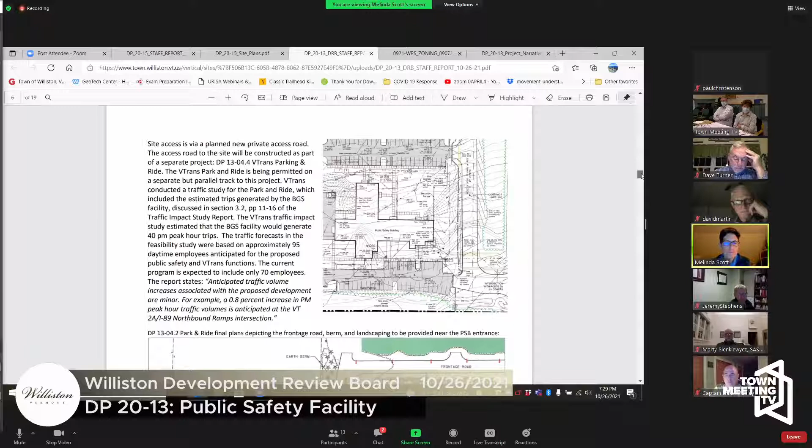The traffic impact study estimated that the BGS facility would generate 40 p.m. peak hour trips. The traffic forecasts in the feasibility study were based on 95 daytime employees anticipated for the proposed public safety and V-Trans facilities, and the current estimates are 70 employees. So the report concludes that the anticipated traffic volume increases associated with the proposed development are minor.

For off-street parking and loading, the vehicular parking proposed complies as proposed. The proposed use is rather unique, and the state is partially exempt from zoning, so staff does recommend approving the 86 parking spaces.

There is not, when usually we have a parking analysis with the use indicated, based on Table 14A of the bylaw, which specifies required parking based on different uses—but this use is actually not included in that table in Chapter 14. So it's kind of at the discretion of the DRB to determine the allowed parking.

Staff does think that the amount of parking is pretty reasonable given the use. The applicant is proposing 86 parking spaces: 36 public parking spaces, including 3 ADA spaces, and 50 employee parking spaces and 1 additional ADA space. The parking lot design, landscaping dimensions, ADA, and bicycle parking all comply with the standards of WDB 14. It's only the number of vehicular spaces that would need an exemption from WDB 14A.

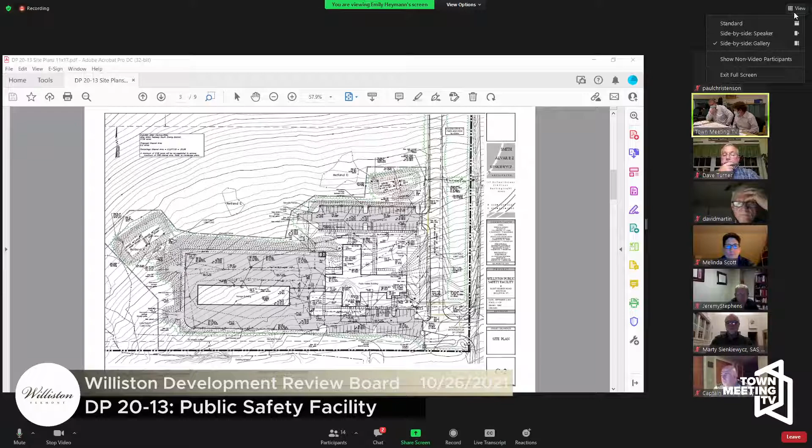So I'll do my best to describe it. Essentially, as Melinda discussed, the project will share access with the V-Trans Park and Ride on the south end of the site. Vehicles will come in and turn right to go to the park and ride and to our lower parking lot, the employee parking lot. Public users will go in straight from Route 2A into the site where the public parking is, then through a gated access to get to the storage building and those facilities. The public safety building is directly north of the public parking. We're taking advantage of the hillside to have essentially a walkout building, where one level is on the public parking and you'd be down a full story on the north side facing the employee parking.

The monopole we're talking about is, I would describe it as just off the northwest corner of the closest wing of the building towards the lower parking lot. It does say new antenna there on the plan. I want to make sure everybody watching is aware of what we're looking at, so there's a label there that says new antenna, and I know that's a concern.

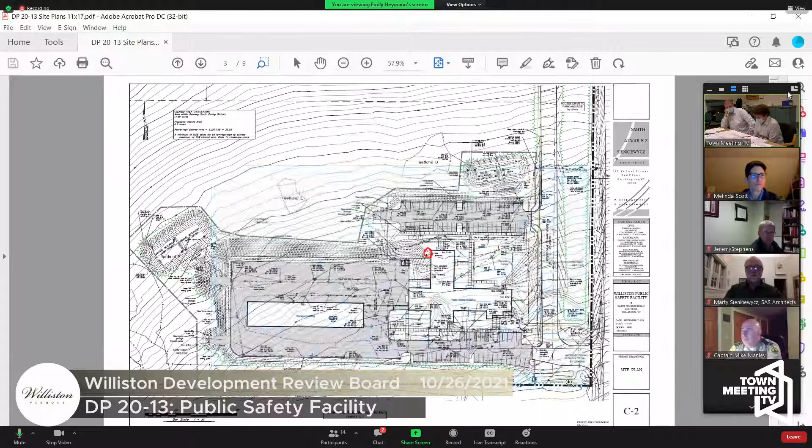There are other particular site features people might be wondering about: the two stormwater treatment practices, our gravel wetlands. One is off to the northwest corner past the storage building and that parking, and one is directly north of what we're calling the lower parking lot, the employee parking lot, back towards where the park and ride is going to be. So those are the things that came up during discussion. Was there anything else people wanted to know the location of?

Public access is on the south side of the building, right across from the public parking. The Sally Port is off to the west side, basically facing the storage building. So you go through the gate, keep bearing to the right, and come around to the west side of the building in the back. The lower parking lot is basically for the 911 call center and employee parking, and that'll be gated access as well.

It might be useful, and I realize you're working in tandem with, I'm not sure who, is that you Simon drawing on here? Nicely done, I think he's got it. Maybe just outline where the fence is and where the gates are, since we've been talking about fencing here and screening and whatnot.

So the first gate, if you look at the public parking area on the south side, you see where it says new concrete curb in the middle of the parking lot—it's just to the left of that. You can see where the fence comes along the south side of the property in front of, behind the storage building parking, then turns north and goes across, then comes along in the general area where that Sally Port is. Simon's just outlined the gates in green, that's accurate. The other gated access is to that lower parking lot, the second access off from the V-Trans Park and Ride Loop Road.

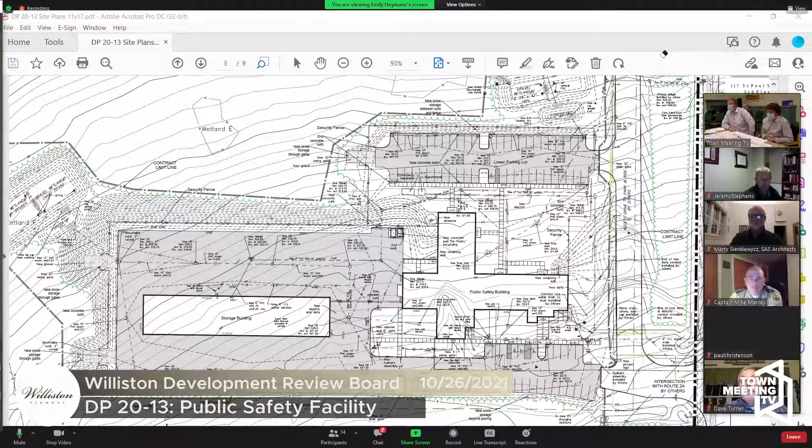For the park and ride? So we'll be seeing that application soon. You've already seen it, already permitted, right? You've seen the discretionary permit and amendment on the park and ride. They've filed final plans and are in process with the administrative permit. So you won't see it, but you have.

We have seen it, yeah. They're slightly ahead of us. Yeah, they're about one step. Not for long. Yes, which

Facility is scheduled to be completed first, the park and ride? It's definitely sort of a parallel path. I think there's a very good chance the construction will be occurring on both at the same time.

So is the access road going to be built in its entirety, top and bottom, at once? We haven't really compared their schedules. Our hopes are that they get this curb cut in for us, and if they don't have it built, we'll have to work with them on getting our construction vehicles in while they finish their road. I assume your plan, if they don't have it built, is you're gonna be bringing it in on the south entrance.

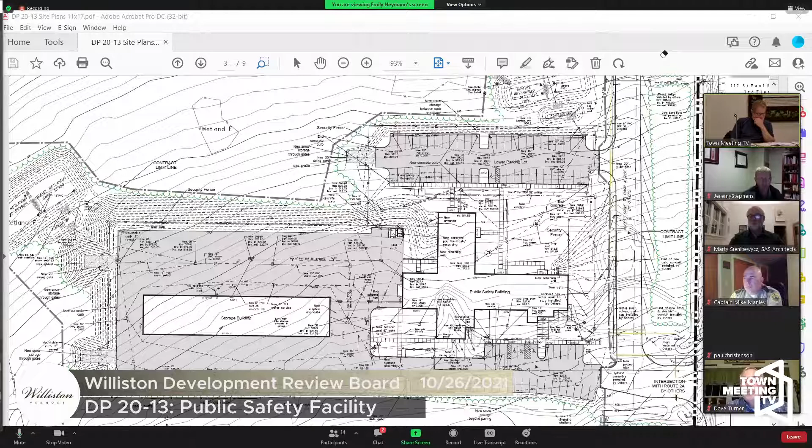We're gonna have to build an access road through their curb cut area to get into the building. But we've been in communication with them, and our hopes are that they get this built for us, or roughed in, so we can use it for construction vehicles. Okay, yeah, it's interesting, I'm looking at the plan here, at the south entrance to the parking lot.

It doesn't look like the driveways line up right there on this plan that I have. It's a bit of an offset entry, and that was to stay away from a stream buffer. There's a small stream just off the property to the south, and so we had to tweak our entry over

to address that. So which of these is accurate? It's accurate, but it's just, it doesn't look like a perpendicular T. Okay, so the south side comes in at an angle? Correct, yeah, so the curve on the access road is gonna kind of come around and meet up with the,

yeah, I'm not sure how that's actually working, to be honest with you. The plan I'm looking at, they're offset by probably 10 or 12 feet. I'm not sure where you're talking, John. I'm looking at this, actually, it's the north, I guess it's the north access point, not the south, I'm sorry.

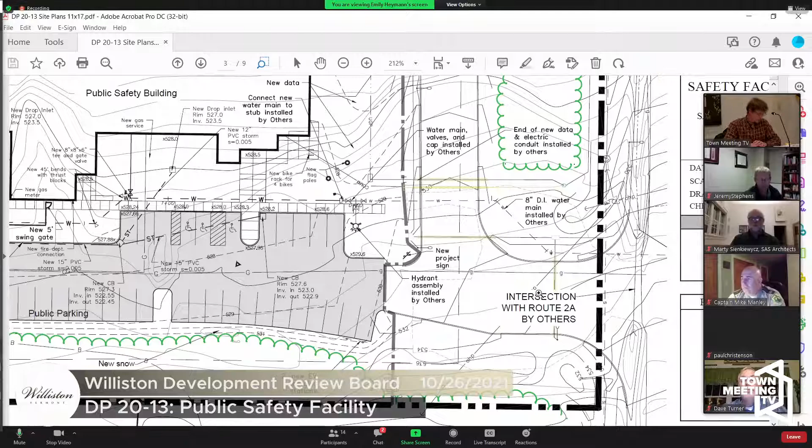Well, this is south, isn't it? The south at the bottom, so I'm looking at the one in the north, the lower lot entrance, the employee parking lot. I see perhaps a very small offset, which we'll fix. Okay, I'm looking at sheet L1, maybe that's an older version. Oh, that could be. Yep, that would do it.

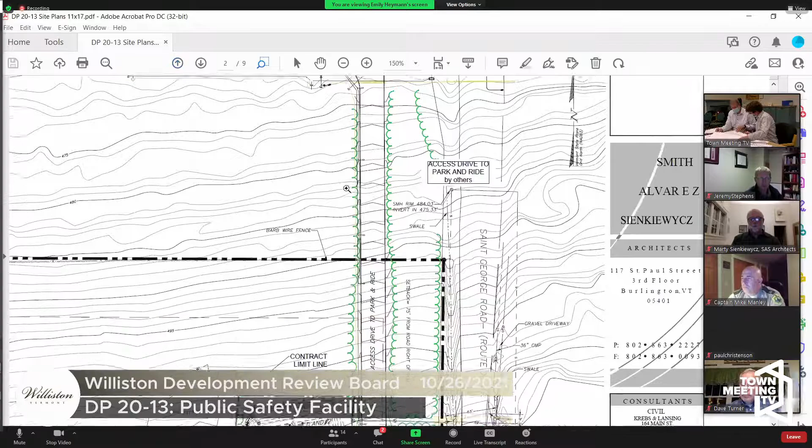Never mind, you might want to adjust the landscape plan. They're always the last to know. They are the last to know, you're absolutely right. That serves me right for looking at the landscape plan. C2 seems to line up. Yeah, so, all right, we've straightened that out, so to speak.

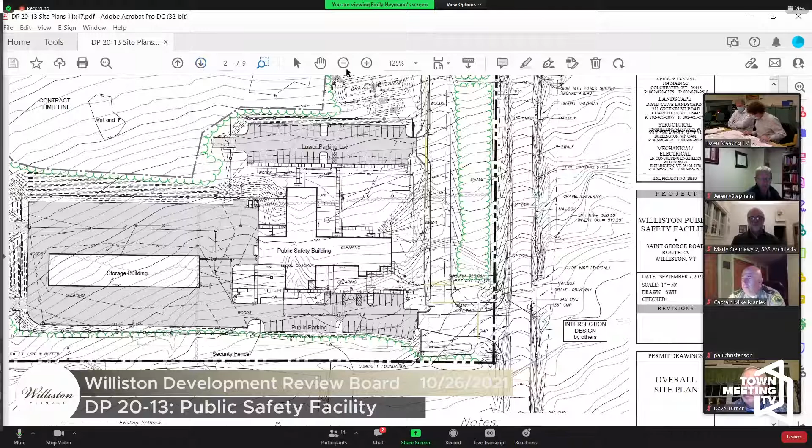So I think I'd like to hit straight on a couple of the issues that staff brought up. Let's talk about the monopole. I think it's important here that, my understanding is we're trying to establish that it's necessary for the functional intended use of the facility for us to allow this exemption. I think that's the way I read the rules here. So you've submitted a report saying that you need an 85-foot pole.

Is that right? It came from a company called Comcast. I think, yeah, ComCheck, I'm sorry, ComSearch. ComSearch it is, yep. And so they did a microwave path survey from our site to both Camp Johnson and Mount Mansfield. I see, and that's what we have to have communication to.

All right, and are there requirements of how close to this building that pole needs to be? I believe so, I believe it has to be within 15 feet is the number. Actually, it's 10. It's 10. Okay.

So how tall was the pole down at the existing facility, down at the bottom of the hill? Captain Manley, do you know the answer to that? Sorry, I don't have the exact measurement. I can get it, it's a pretty substantial tower as well. I think the information actually shows up in your report somewhere that it's close to the same size, about 85 feet.

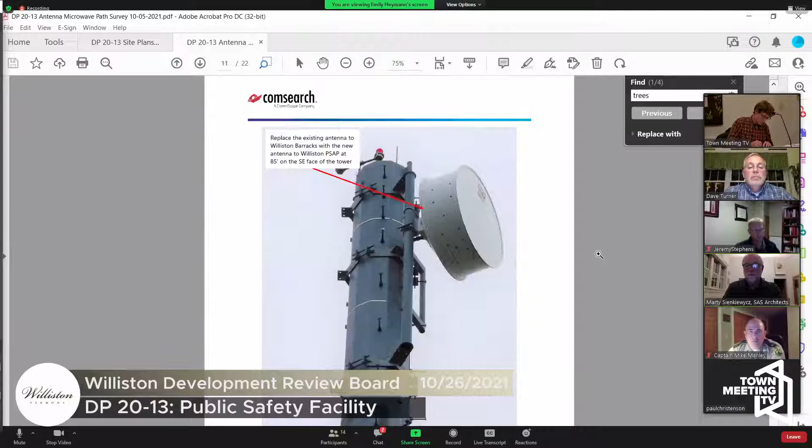So what color, what color? He said to match the sky. Match the sky, right, is it on a sunny or a cloudy day? Well, there's a lot of studies that have been done about that color, and I think that, for example, a lot of the big windmill towers that you're seeing now have studied that a lot, and their color does a good job of matching the generally overcast skies that we see here.

So I'm thinking it's that kind of light gray color. The pole will be painted. So it'll be painted, and I assume that that's a color that'll be submitted with the final application as well. Yes, we can do that.

So, Paul, did you have anything you wanted to ask about the pole? One thing I was gonna ask is, would the higher pole improve the cell service down the interstate? I would say only if there's any cell providers sharing that pole. It'll improve it at my house too, but that's not a cause of concern.

Let's talk about one of the other items that came up here, which was the lighting and the lighting control sequence. The HAC made some very specific suggestions and recommendations, and I'd like to hear how you feel about those. We actually went through it with them. This map on here between the blue, green, and red, we're okay with. The other conditions are fine, with the exception of what Melinda had mentioned about the dimming levels.

Thank you. So basically, if you get the tenants that you have on this existing antenna, the new antenna would have a similar population with cellular and other radomes on it.

I'm not sure what he said. So, like on this antenna right here, on the pole, I'm assuming your microwave dishes are the white one right behind the line and the other one headed towards the transmitter site. That would be my assumption. I'm not a radio person, but that would make sense.

And the rest of them above that are cellular? That would be my assumption as well, yep. And then we have the Jericho Fire Department on there somewhere as well. Okay, thank you. You're welcome.

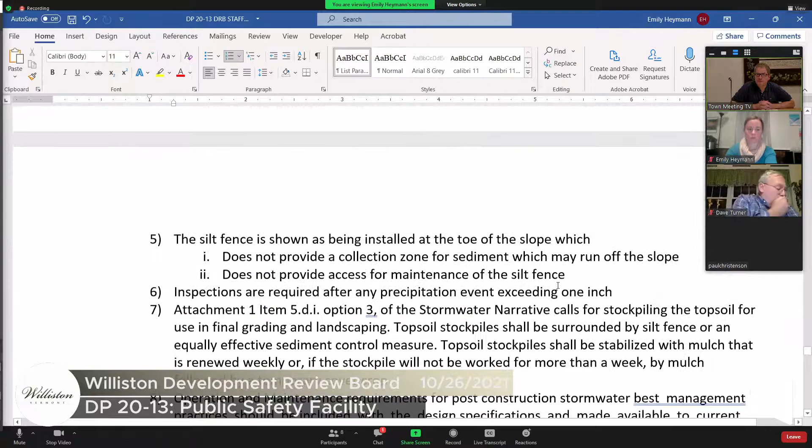Okay. This is great. What condition is that? This is 2D. Is that condition, okay, is that still condition 2? 2D4. 2B4? D. 2D4. The HAC recommends that the outdoor lighting levels be modified as follows.

Employee parking (blue): lighting shall be dimmed by, excuse me, let's try that again, lighting shall be dimmed to 75% from dusk till dawn, and then the sentence goes on from there.

Scrolling down, security lighting area (red): the storage area shall be dimmed to 75% during night hours, and the sentence goes on from there, unchanged. Next section of this condition: all pole-mounted fixtures (labeled SA) on the south side of the public parking lot and storage area. Sentence goes on from there, unchanged.

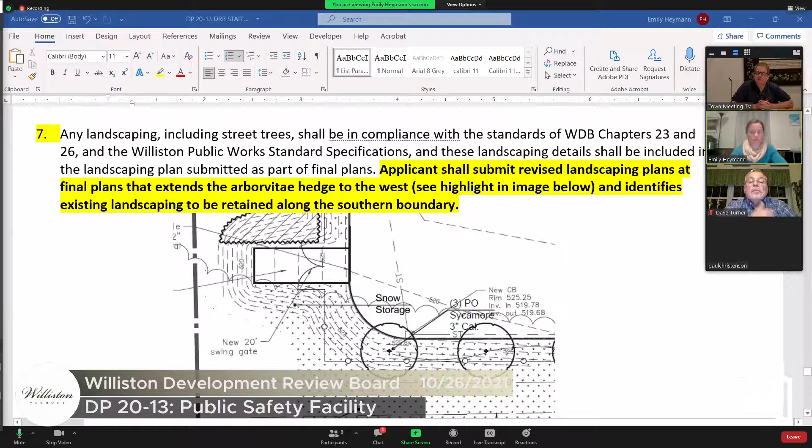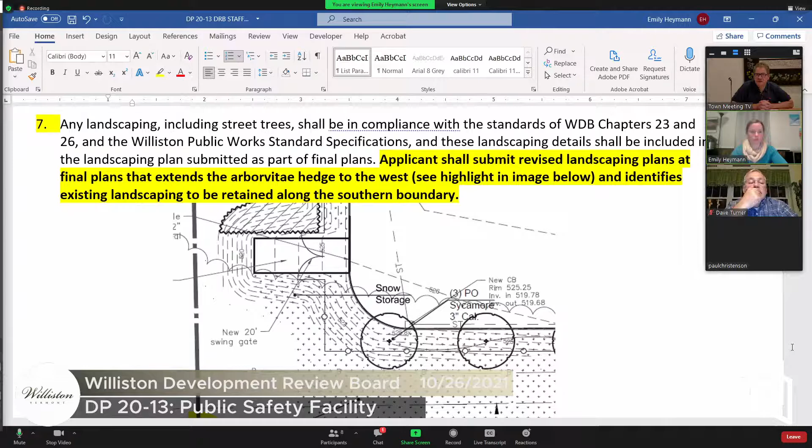And condition number 7, we are adding the sentence: applicant shall submit revised landscaping plans at the final plans that extends the arborvitae hedge to the west (see highlight in image below) and identifies existing landscaping to be retained along the southern boundary.

Condition number 15, we are adding a sentence that says the transformer and generator shall be screened with landscaping to soften the view from the public access road. And finally, condition number 22, we are adding a sentence to the end of the condition stating the pole and antenna shall be painted a matte sky gray.

Thank you, Scott. Do I have a second on this motion? I'll second it. David Turner seconds it. Any discussion? Good.

So, aye or nay? Scott Riley. Yay. David Turner. Aye. Paul Christensen. Aye. John Hemmelgarn is also aye. That's 4 ayes, 0 nays. Motion passes.

All right, so the next agenda item, communication, other business. I know of none.

So, do I have a motion to approve the minutes of October 12th, 2021? I'll make a motion that we approve the minutes of October 12th, 2021 as written. I'll second it. Scott Riley seconds it. David Turner made the motion. All in favor? Say aye. Aye. Aye. Any opposed? We have 4 ayes, 0 nays. Minutes are approved. Do I have a motion to adjourn?